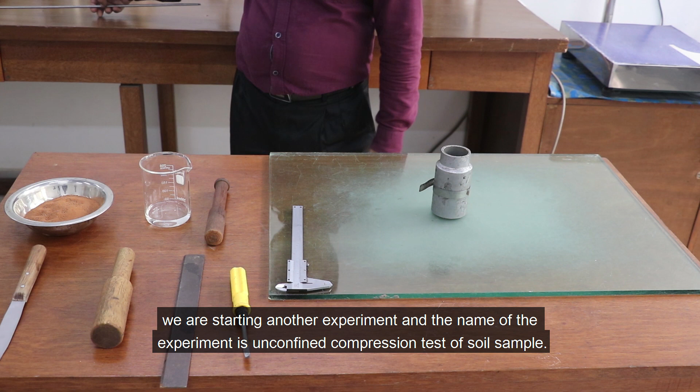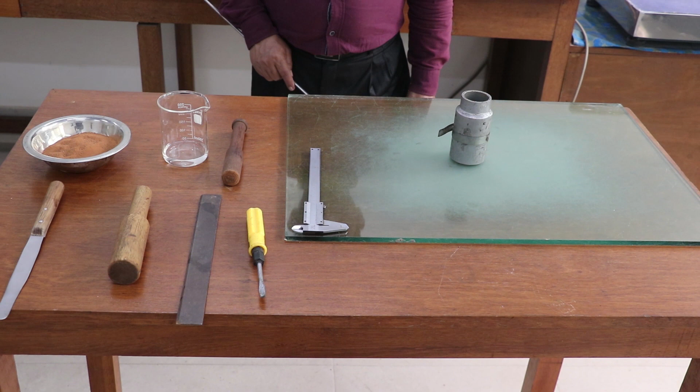So we are starting another experiment. The name of this experiment is unconfined compression test of soil sample. So before starting the test, we have to know about the theory. The unconfined compression test is widely used as a quick, economical means of obtaining approximate shear strength of cohesive soil.

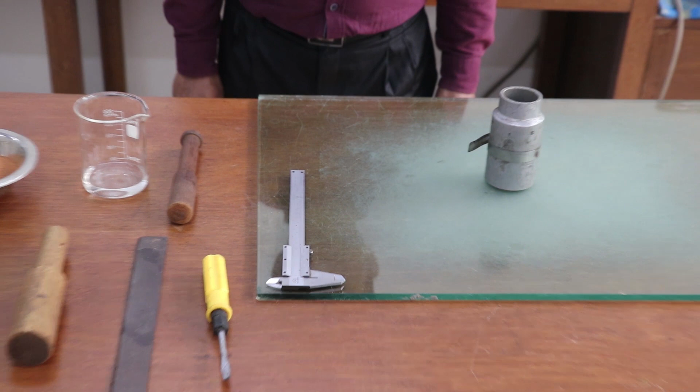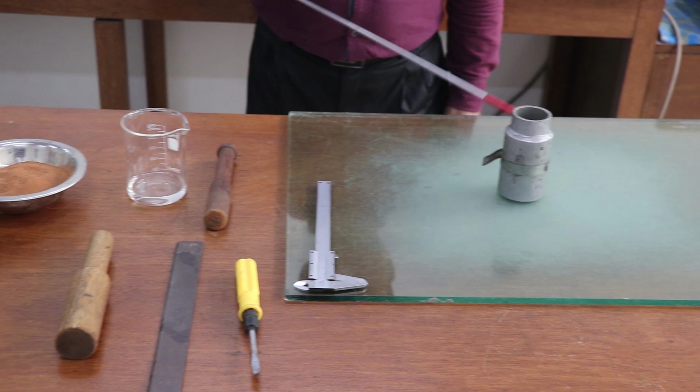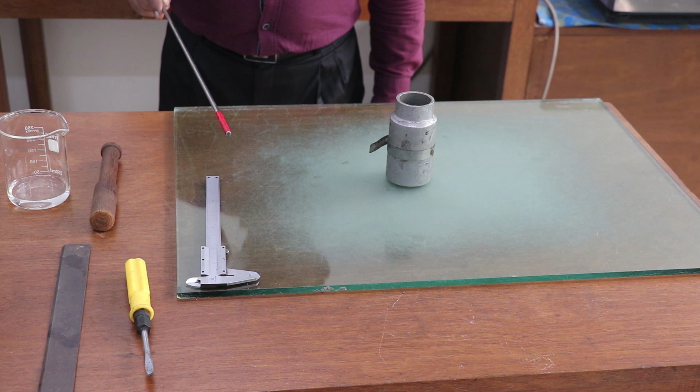So our target is to get the shear strength of the cohesive soil, and for that we are using some apparatus or equipment to conduct the test. First of all, we have to take a glass plate. You can see a glass plate on which we have to prepare the soil sample, and on the glass plate you can see a mold, and there are a number of parts in the mold. So whenever we are breaking the parts in each mold, we can see the different parts.

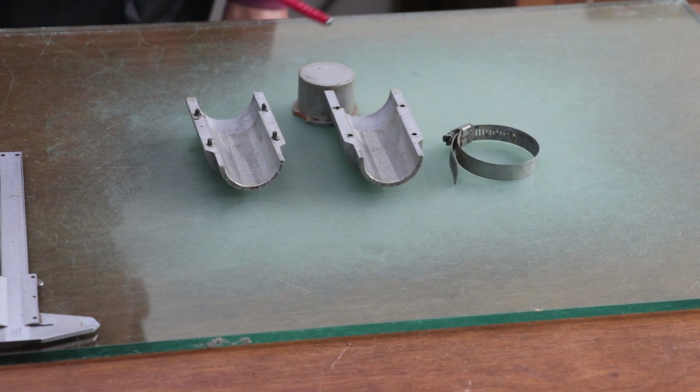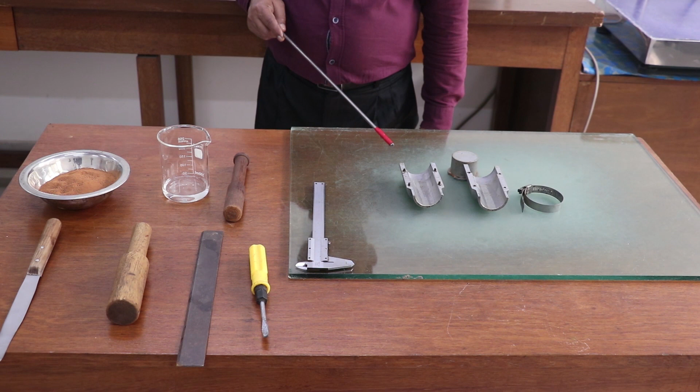There are 4 parts. The 2 parts are in the sides of the cylinder, and there is an edge part, and you can see the opening part is there. So these are the combination of mold. Now we can go for the vernier scale, slide calipers. In slide calipers there is a vernier scale where you can find the diameter of the soil sample or the cylinder.

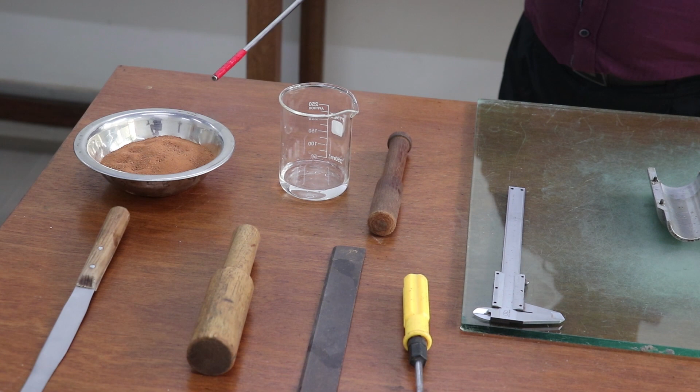To break the cylinder we have to use a screwdriver. You can see there is a screwdriver here, and for the tamping process you can see there is tamping wood for the tamping purpose, and you can also see the spatula here. And now we can see the soil sample. You can see a soil sample there, and this is dry soil sample, and you can also see the beaker and the water in the beaker.

And to get the dry soil sample you have to use an oven. You have to use the oven for the dry sample, and now we are trying to see the oven. Here you can see the oven. By using the oven we can find the dry soil sample. So let's start the experiment.

So before starting the experiment, you have to combine all of the components of the mold. And you can see how we can combine the mold. And to get it tight, you have to use the screwdriver. You can see. So we are continuing the combination process of the mold.

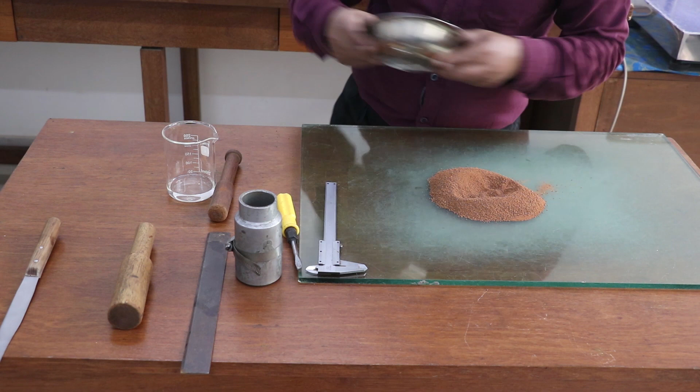So after pouring the water into the soil, we have to mix, and in that stage we should be very careful, because all of the soil components should be mixed in a proper manner. For this purpose, we are using the spatula, which was previously shown in the equipment for the experiment. You can see how it mixed.

The soil is now getting sticky, so you have to use the spatula again and again to get the total soil sample from the glass plate. And in that step, you can see why we are using the glass plate here. It is much easier in the workability process. If you are using the glass plate, the workability is higher than with wood. You can see the process, and we are almost getting closer to the end of mixing.

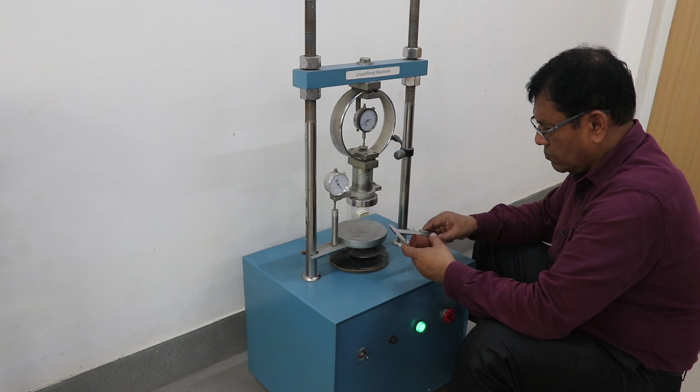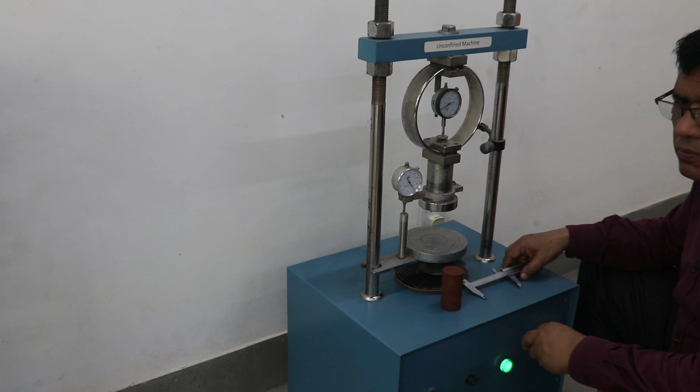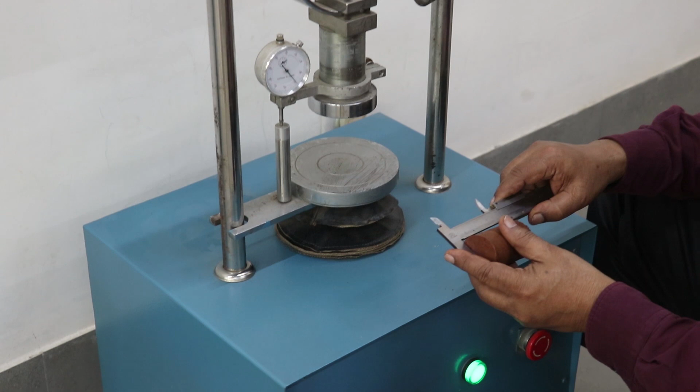Okay, now we are getting closer to the compression test experiment, and after completing the soil cylinder, we have to take the height and the diameter of that mold. So we are using the slide calipers to take the height. We are getting that the height is 76.5 millimeter.

So this is the calculation of the height, and after that we have to take the diameter of the soil cylinder. You can see the diameter is 38.6 millimeter. So we are getting that soil sample in the machine.

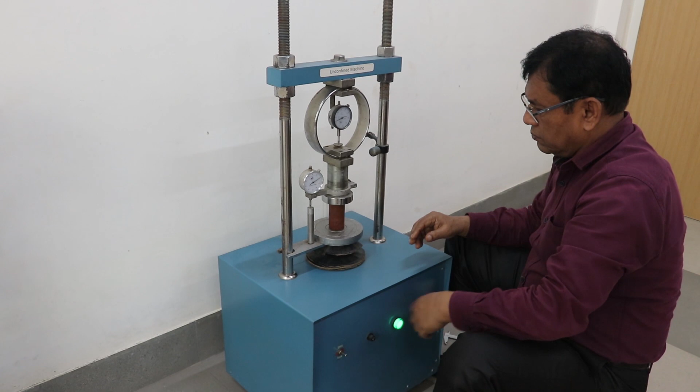So before starting the test, we have to describe the soil machine. Like you can see, there is a machine, and this is only dedicated for the unconfined test. And so the machine is called the unconfined machine. You can see there are two dial gauges. The first one, which is below the machine, actually indicates the deformation of the soil sample.

So you can see if the soil sample is deformed by 1 millimeter or 2 millimeter or 3 millimeter, then this dial gauge gives us the reading of the deformation of the soil sample, and in the upper portion there is also another dial gauge, and in this dial gauge you can get the amount of the load which is imposed on the soil sample.

Suppose you are giving 2 kN load or 4 kN load, then there is a reading in the dial gauge, and in that dial gauge there is a small portion where you can find the fractional values of the dial gauge. So let's start the sample taking.

So we are starting the machine to get the result, to get the actual value of the load, and we are continuing this process till the breaking of the soil sample. And in that case, we have to take a number of readings at different times. So we are getting the reading like, in this case, you take the first result, first reading.

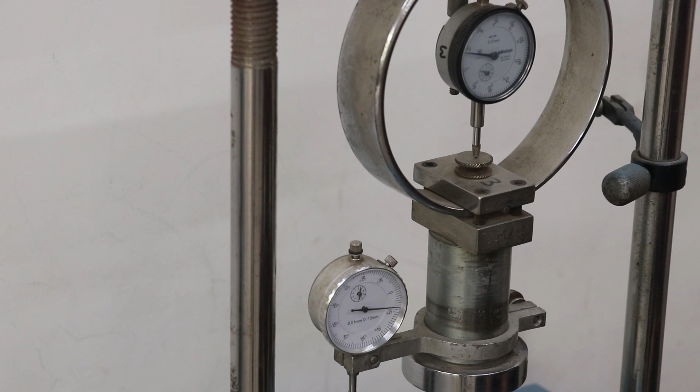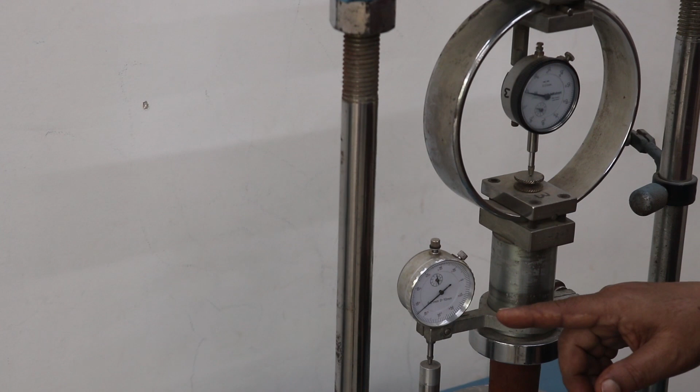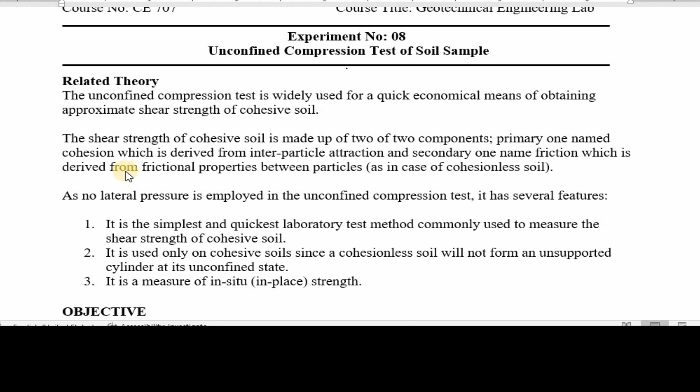Okay, we are ending, or we are getting the results. So this is the end, and we are finishing the experiment. And by calculating the axial deformation, the strain, and instantaneous area, we can find axial stresses. This part is going to describe the calculation of the unconfined compression test of the soil sample.

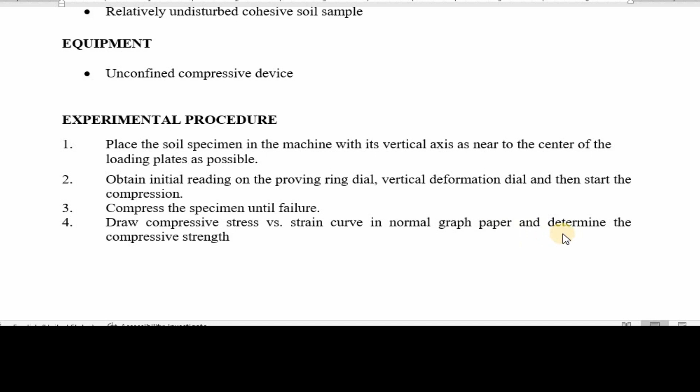You can find the related theory, objective, materials, equipment, and the experimental procedure. In the experimental procedure, the last point says to draw a compressive stress versus strain curve on normal graph paper, and from that graph we can determine the compressive strength. So last of all, we have to draw a curve or graph.

At the beginning of the data sheet, we have to take some values like the initial diameter of the sample, that means D naught, initial height of the sample H naught, initial area A naught, which is given by pi d square by 4, so pi into d square by 4. Area is 1.79 inches square.

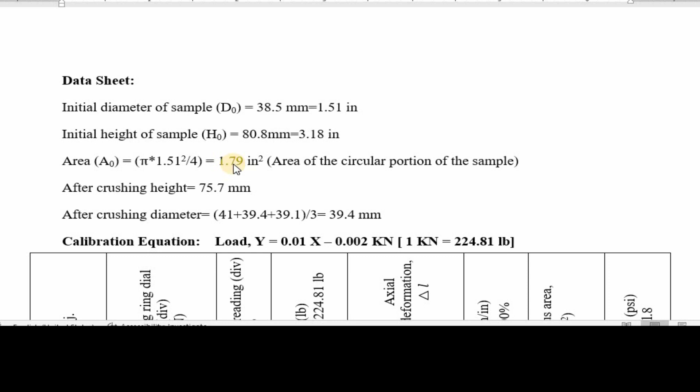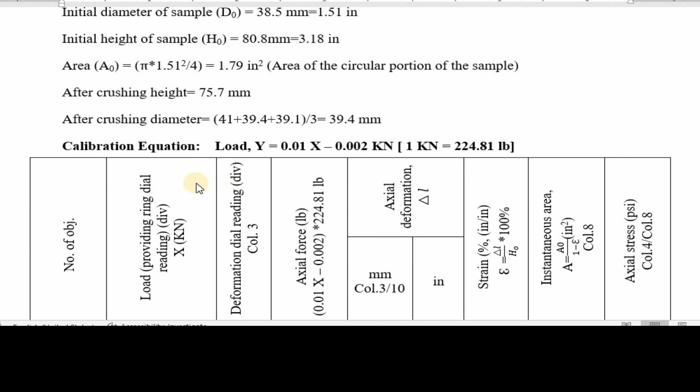After crushing, the height would be reduced to 75.7 millimeter, and the diameter changed to 39.4 millimeter. We need some calibration equation to calibrate our results. You can see the number of observations are there, and in the previous video we found there are two dial readings.

One column is for the load and another is for calculating the deformation. The second column describes the load providing ring dial reading in kilonewton, and the third column describes the deformation dial reading. You can see 50, 100, 150, 200, 250, 300, as previously described in the video.

In the first observation, you can find the load was 0 and all values are 0, as we are not going to give the load on our cylinder.

In observation 2, you find the load amount is 15, in kilonewton, denoted as x, which is used in the calibration equation. So this is x, 15 kilonewton. The deformation is 50 in the deformation dial reading, and this is the axial force.

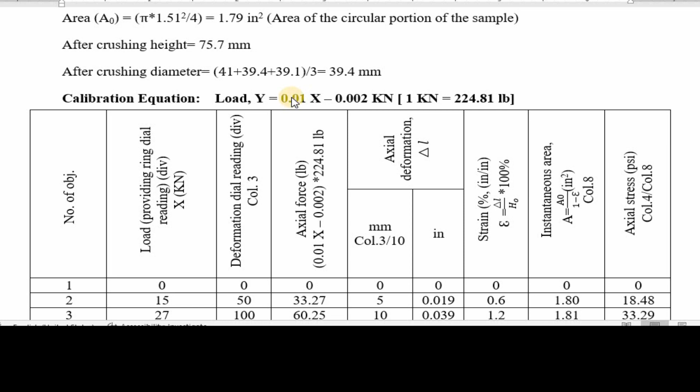Both are the same, but you have to calibrate this load to the axial force in pounds. So we use the calibration equation: y equals 0.01 times x minus 0.002, which is in kilonewton, and if we multiply by 224.81, this converts to pounds. So we take the value 15 and input it as x: 0.01 times 15 minus 0.002, in kilonewton, multiplied by 224.81. Then we find 33.27 in pounds.

Now we have to find the axial deformation, del L. The axial deformation is counted from column 3. If we divide column 3 by 10, we can find the axial deformation in millimeters. This is 50, giving 5. 50 by 10 is 5, 100 by 10 is 10, 150 by 10 is 15.

This is in millimeters, and we have to find the axial deformation in inches, so we convert millimeters to inches. Here we calculate the strain. We previously knew that the equation for strain is the axial deformation, or the deformed length, divided by the actual length. The actual length is the initial height of the sample, 3.18 inches.

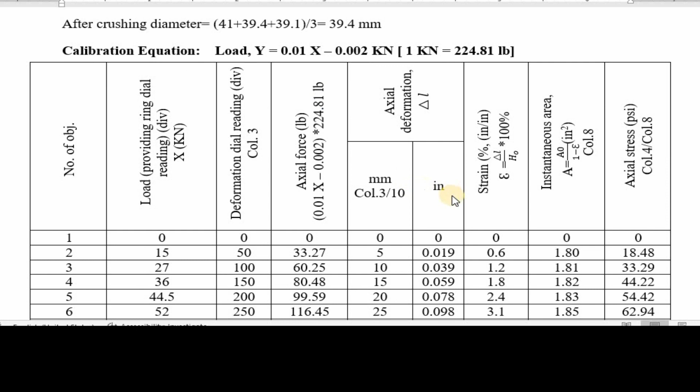So the strain epsilon equals del L divided by H naught, times 100%. The del L value is 0.019 divided by 3.18 times 100%, giving 0.6. Simultaneously, 0.039 divided by 3.18 times 100% gives 1.2. After that, we find the instantaneous area.

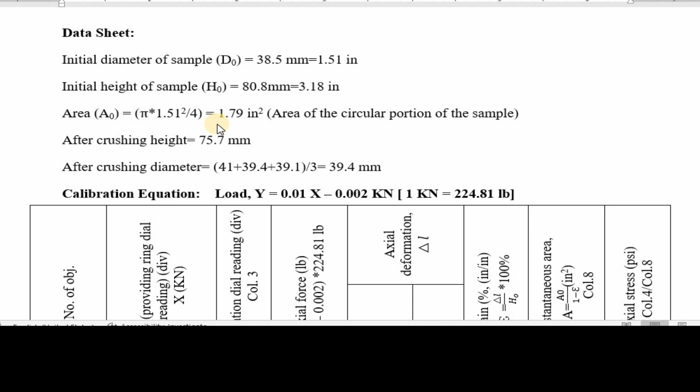That means A, where A equals A naught divided by 1 minus epsilon. A naught is given in the datasheet at the beginning, the initial area, with a value of 1.79 inches squared. The epsilon value comes from this column, so we can get the instantaneous area, A equals 1.8.

The last column describes the axial stress. We know stress means the ratio of force and area, so we need the force. This is the axial force, and this is the strain and instantaneous area. We divide this by that: 33.27 divided by 1.80.

That gives 18.48, using column 4 and column 8. Column 4 counts as 1, 2, 3, 4, and column 8 as 5, 6, 7, 8. This is 4 divided by 8, and you can find the result.

After that, you have to draw a curve on normal graph paper. On the x-axis, input the strain value, and on the y-axis, input the stress value. This is strain, and this is stress.

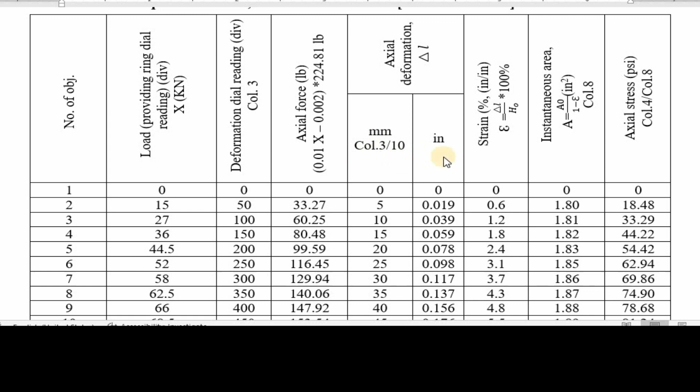Using column 7 and column 9, counting 1 through 7, we can get the curve like this.

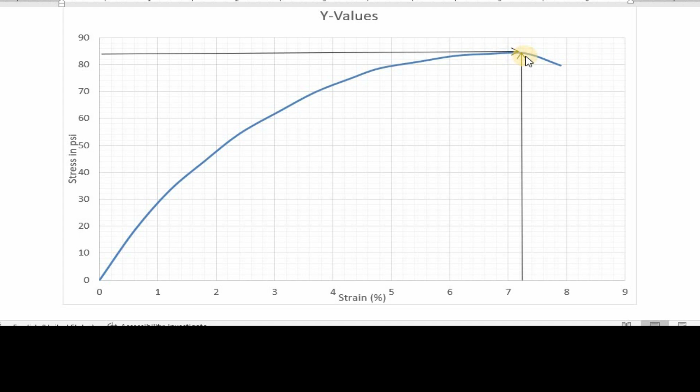From that curve, we take the peak value, which describes the highest stress. This is QU, 84 psi. You can see this is 84 psi.